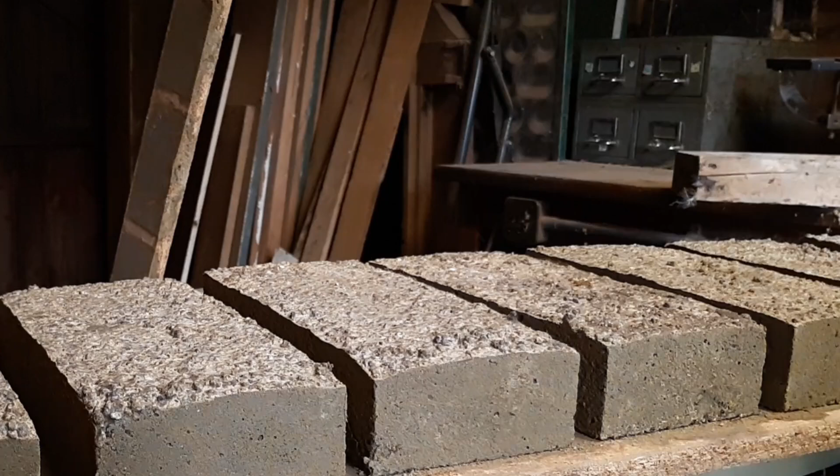Hello everyone, I recently made a video about making refractory fire bricks and realized that people always question why I did things or suggest what they think is better. So this video is describing the mechanisms behind refractory fire bricks and other potential solutions, such that people can design their own based off of the understanding of how the bricks work.

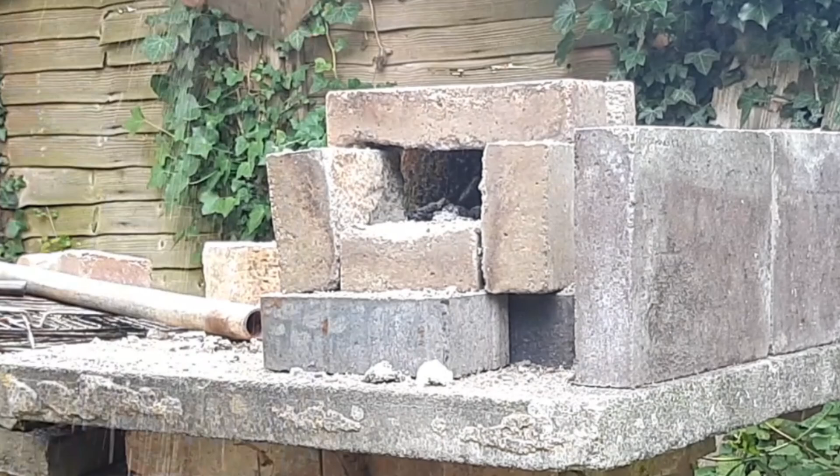To describe the very basic principle that we're trying to make use of, I'll pass it over to E.ON Energy.

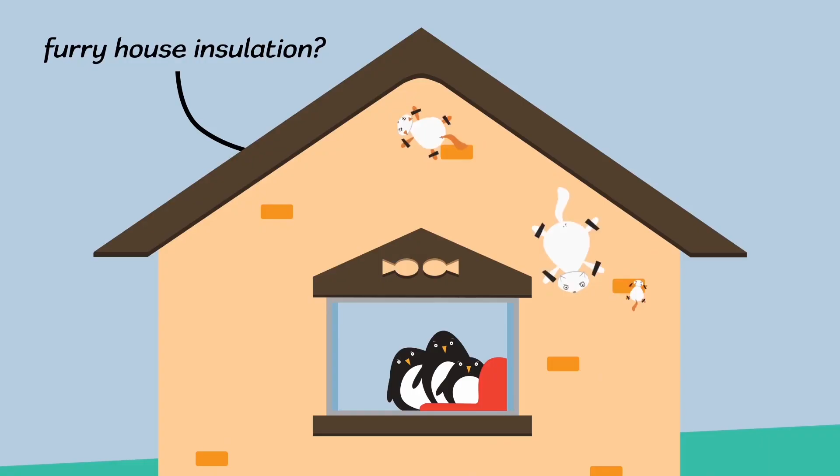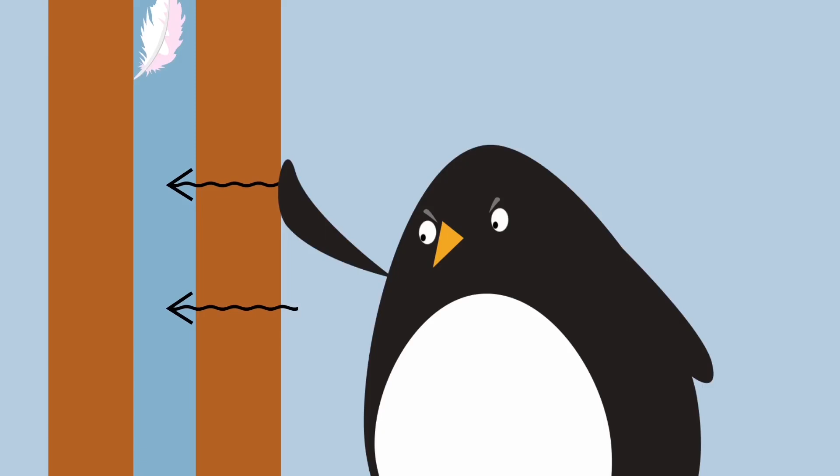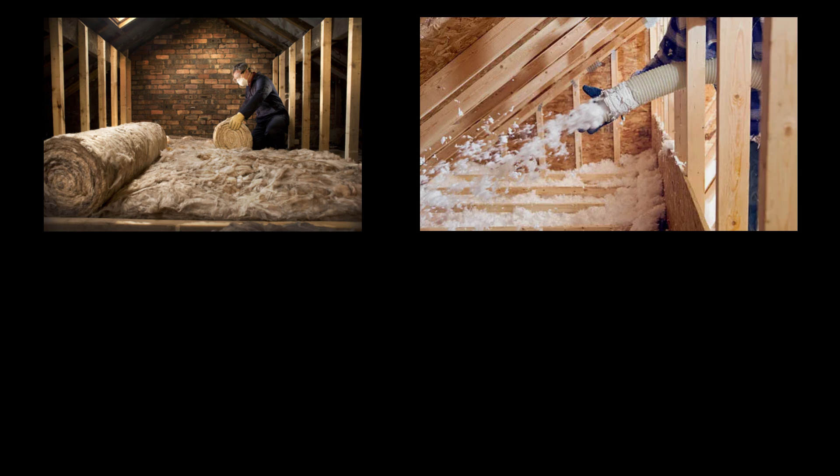While E.ON was only talking about insulation for, let's say, 30 degrees Celsius, the same principle still applies of maintaining pockets of trapped air to retain heat. And as we can see here, there are multiple ways of achieving this same effect. The same applies for fire bricks. So if it all works with the same mechanism, why can't we just use house insulation? VegOilGuy from YouTube tried and discovered why.

It's not pretty. It's clearly charred and it's lost its strength. I can even push my finger straight through it.

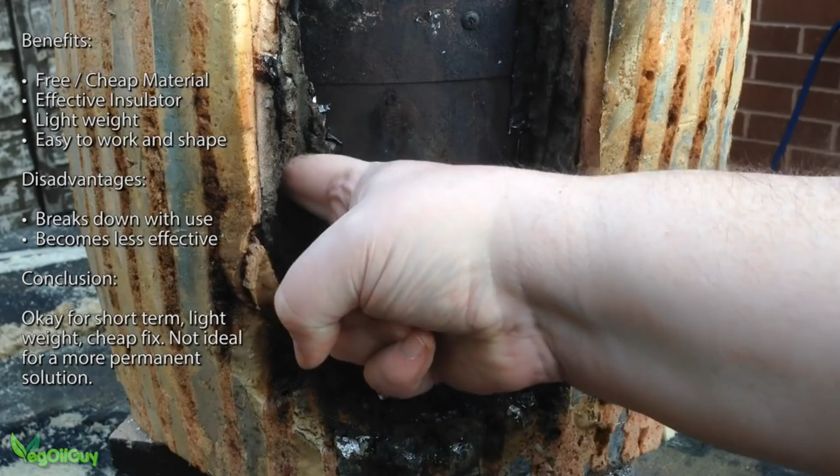He then goes on to describe another method of insulation which he used, which also suffered a similar decomposition after extended and repeated thermal exposure.

Unfortunately, after about the third or fourth use, it begins to fall apart.

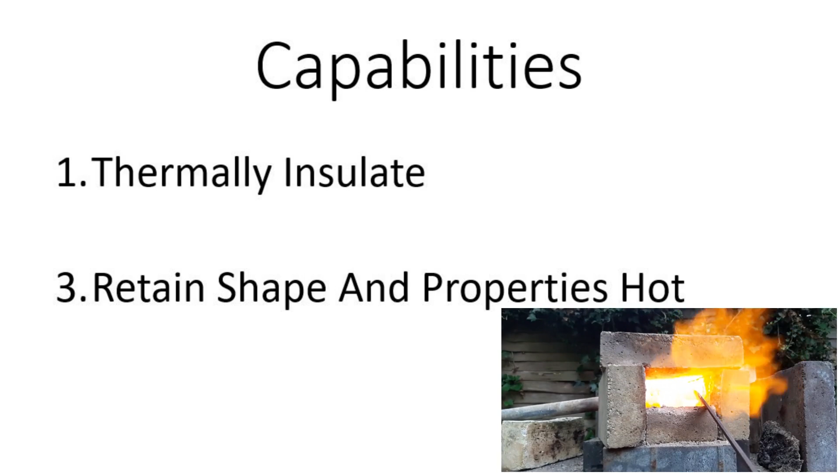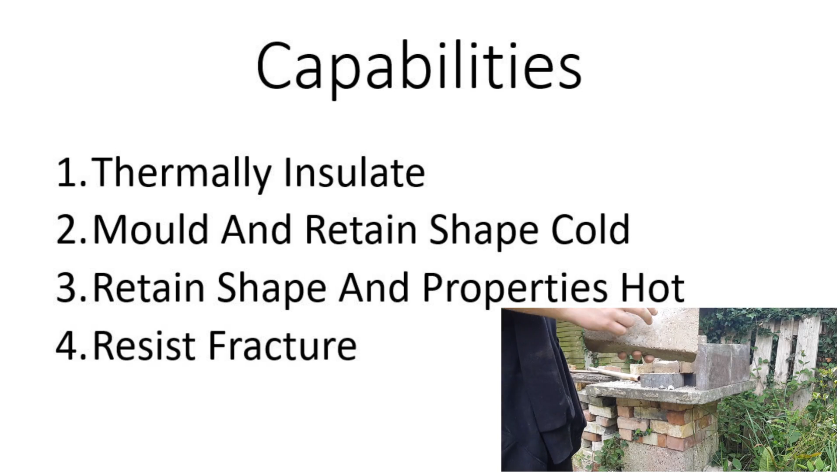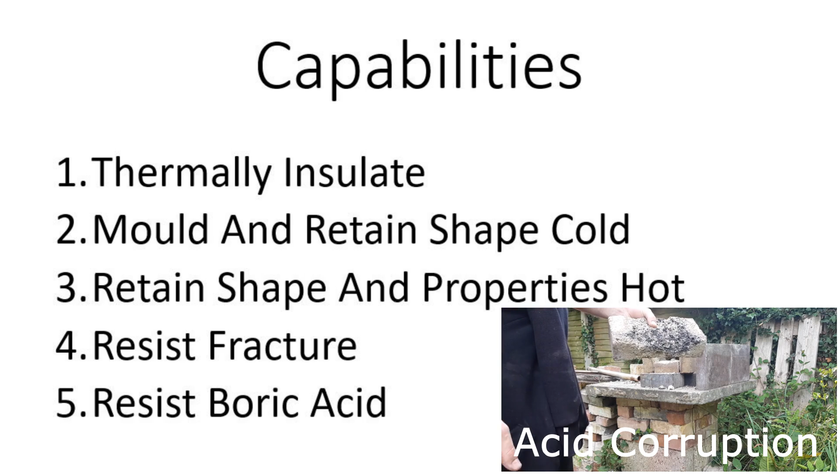This resistance to thermal decomposition is one of 5 basic capabilities that I have defined for what a fire brick should be able to achieve. The first capability is obviously to thermally insulate. The second is to be able to be molded and retain its shape while at a cold temperature. The fourth is basically 2 and 3 combined, but it's a little bit extra, and that's the resistance to fracture just in general. Finally, the fifth is resistance to boric acid. You only really need to consider this if you're working with borax flux, for example if you're making Damascus.

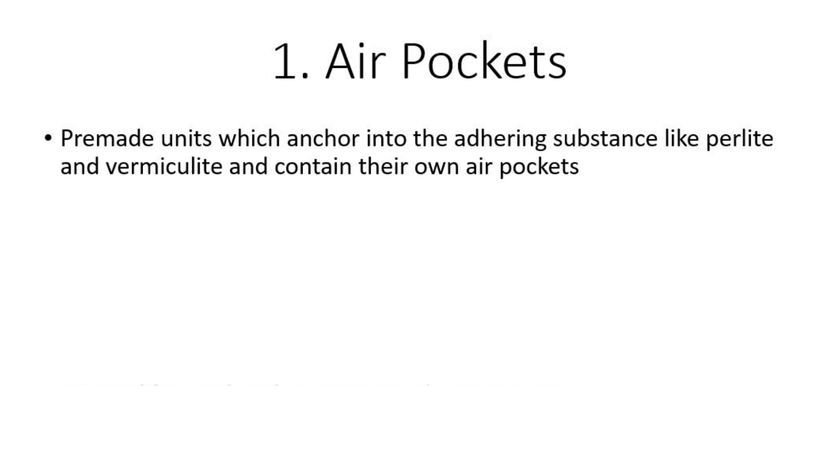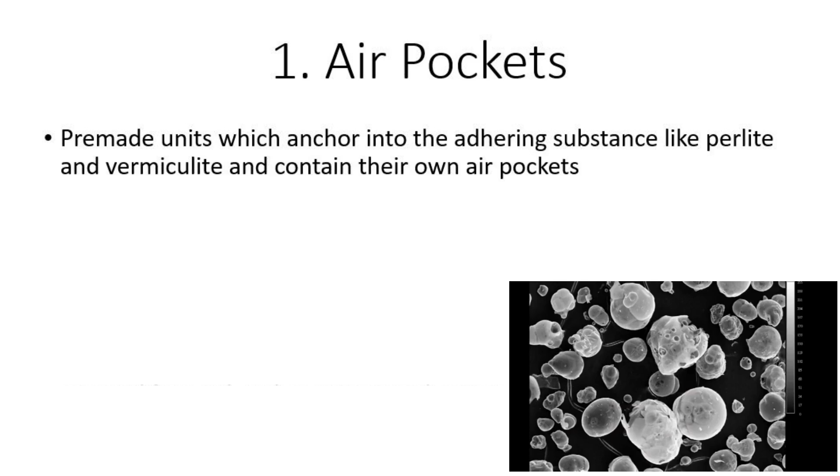So again, to thermally insulate, you want to create pockets of trapped air. One way of achieving this is by including an additive which already has its own segregated air pockets, which is also resistant to high temperatures. What I used in my last video was perlite. I've also used vermiculite in the past. I'm sure there are also many others which fulfill this criteria. Another option is to use a foaming or effervescing agent which will create those air cavities, assuming you're starting from a liquid or slurry state.

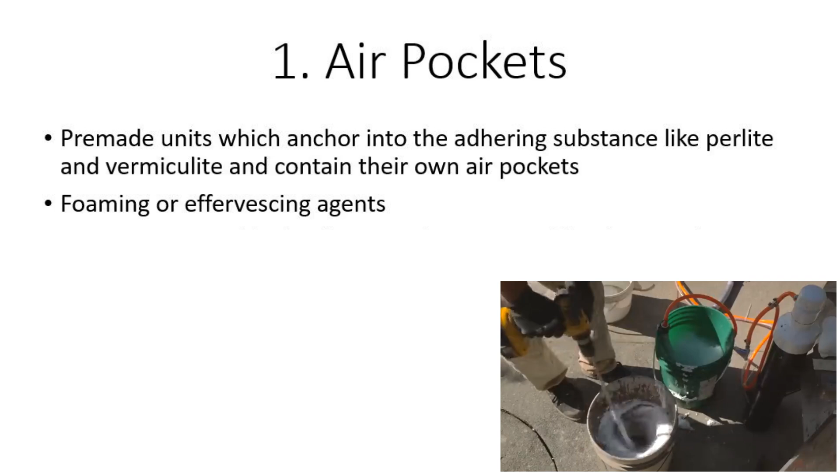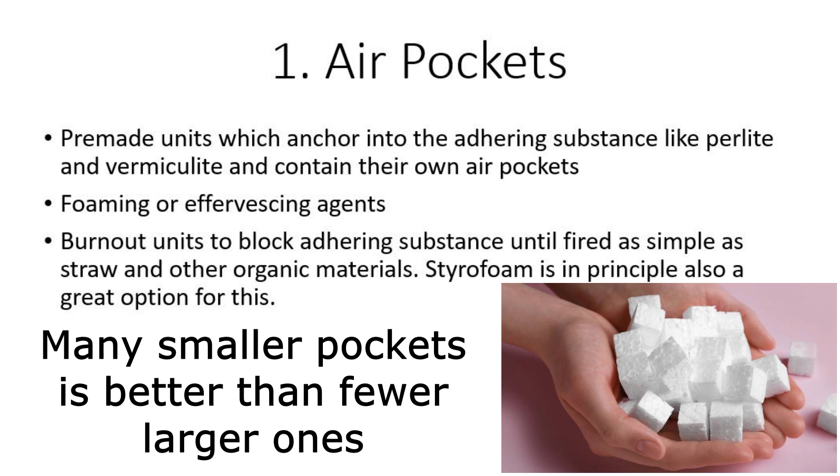The final method I can think of for this is a burnout, so if you include small bits of organic material, or I can imagine styrofoam, that sort of thing would work quite well. Upon firing, these will burn out and leave the required cavity. I believe that adding something with its own air pockets will result in a stronger brick, because what you're using to bind everything together has something to grab onto rather than just itself.

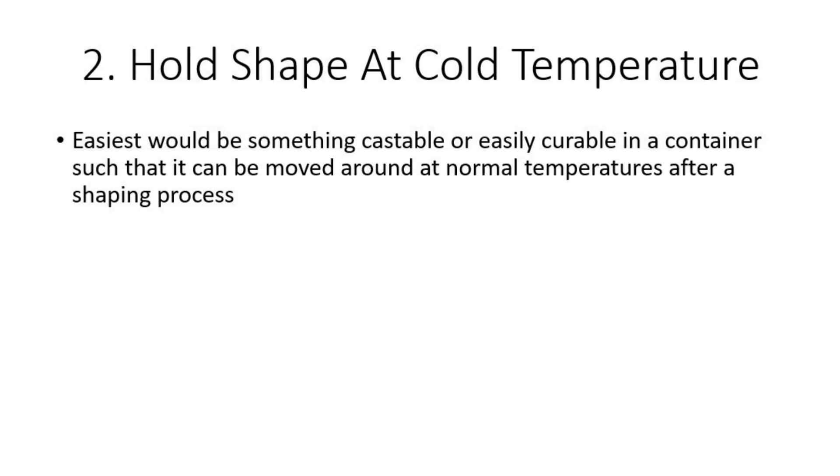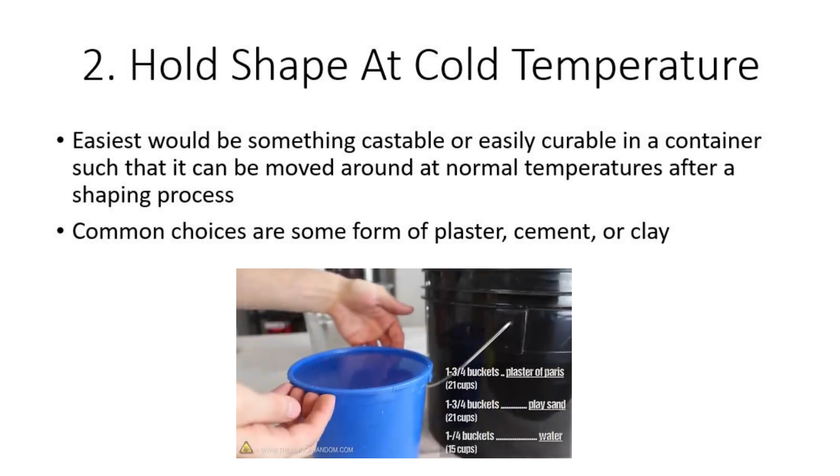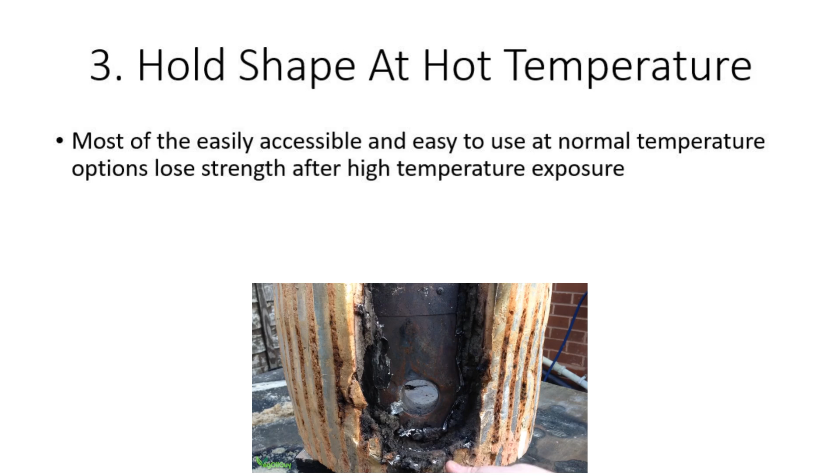Next is quite a basic section. I'm guessing that you want to shape your refractory, so you'll want something that is either castable or fireable. Generally this will be some form of cement, plaster or clay. Just make sure that what you're working with doesn't melt at the temperatures that you're going to be using. As we know from the beginning of this video, only taking these first 2 things into account will likely result in a mixture that will work great to start with, but quickly degrade.

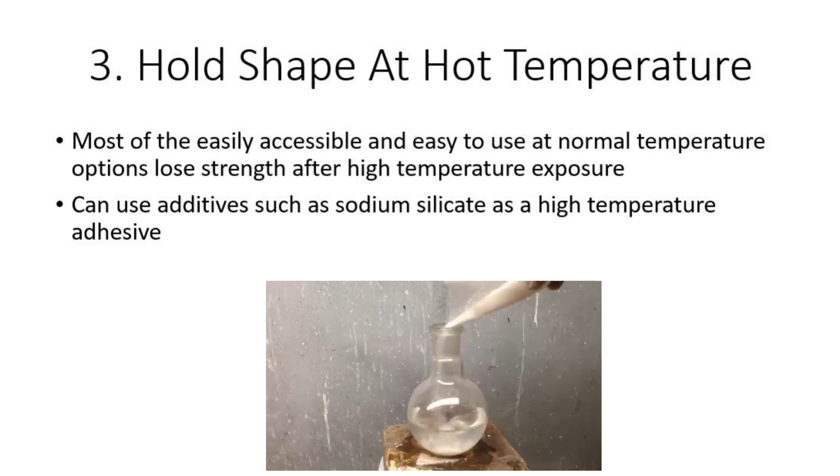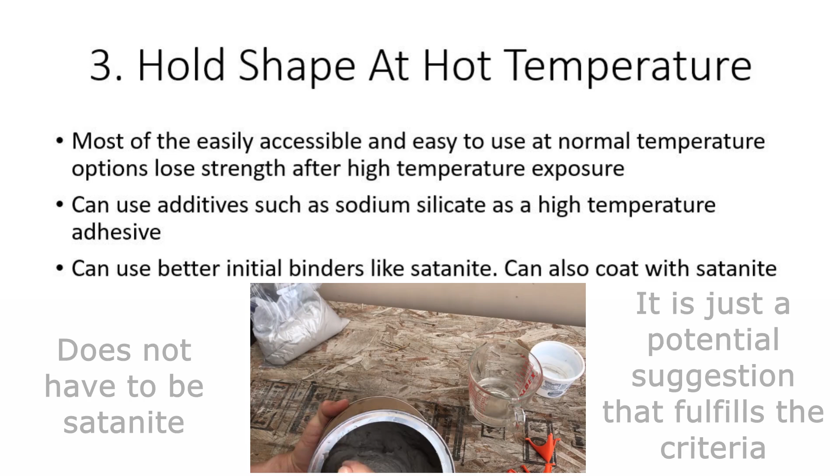A common solution is to use a high temperature adhesive such as sodium silicate or water glass. Another option is just to use a better initial binder such as satanite in place of your cement or plaster. To compromise on cost, you could simply coat your bricks which were made with a weaker binder.

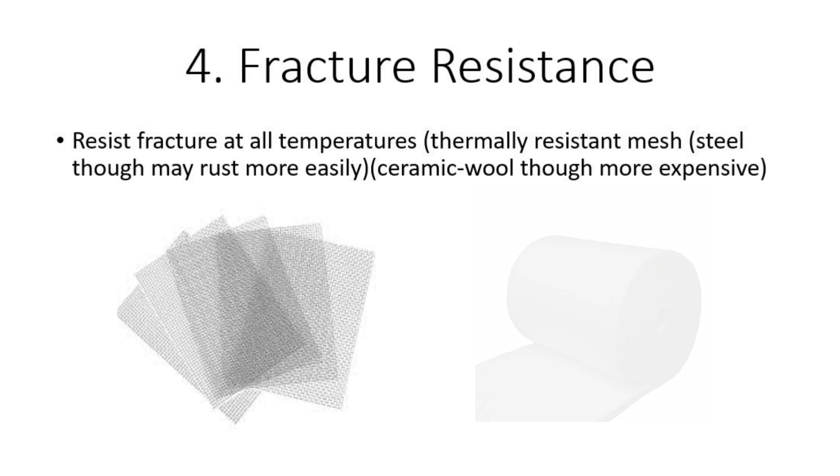Fourth, we have general fracture resistance, for which I could only think of either including a large mesh or some fibrous material. These would also have to be heat resistant, so you'd have to have something like stainless steel mesh or ceramic wool.

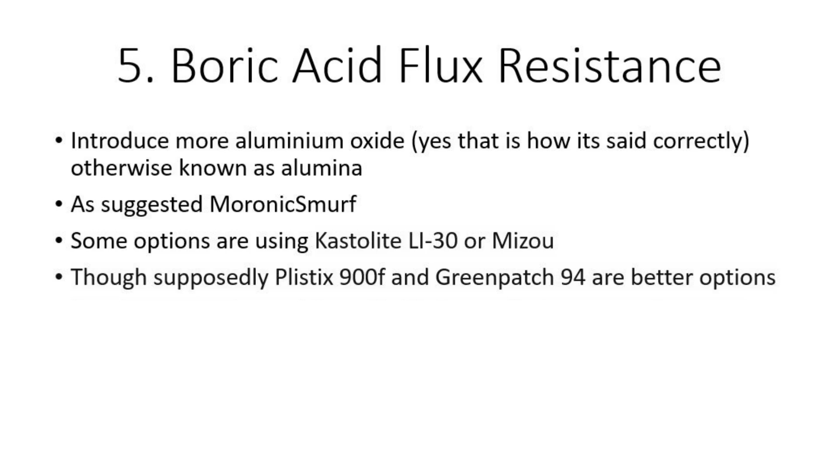And finally we have boric acid resistance, which is necessary when using borax flux. Generally, to increase resistance, it seems you want to increase the amount of aluminium oxide, otherwise known as alumina. You can also use the products on screen as either binders or coatings. Another option is of course just to ignore all of that complicated costly stuff and insert sacrificial pieces whenever you're working with borax.

And there it is. Hopefully that was useful.